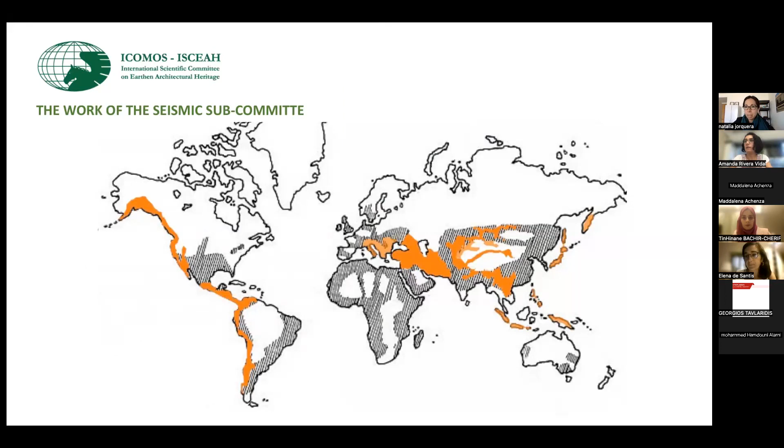In this first part of the meeting, I'm going to present the work of the SEISMIC subcommittee that, as Maddalena said, is one of the 5 subcommittees that are part of ISCEAH, which is part of ICOMOS. I'm going to start with a question. Why have a SEISMIC subcommittee inside ISCEAH? Because, as you maybe know, one of the main threats that affect earthen heritage is the seismic action. And there's a very big coincidence between places with a lot of earthen heritage and the strongest seismic actions in the world. So this poses a big challenge for the conservation of earthen heritage.

I'm going to come back to the first slide. However, there are many myths about the seismic behavior of earthen structures. Not all earthen structures suffer serious damages from earthquakes. So it's a challenge for the research, for the field of earthen heritage, for the conservation, to know which are the real reasons behind the collapse and the damages suffered by heritage.

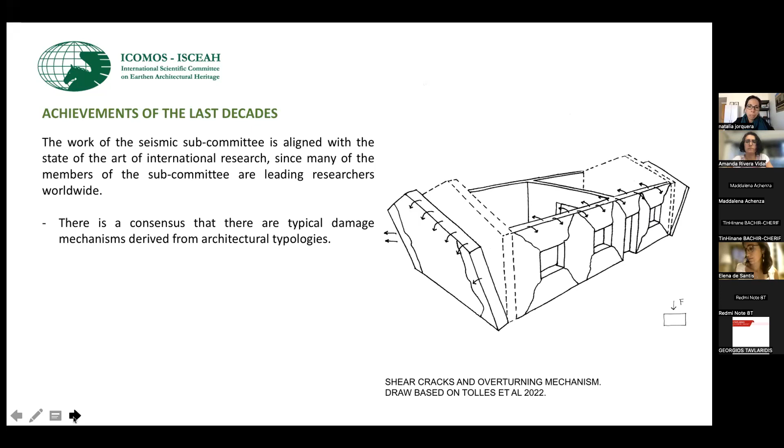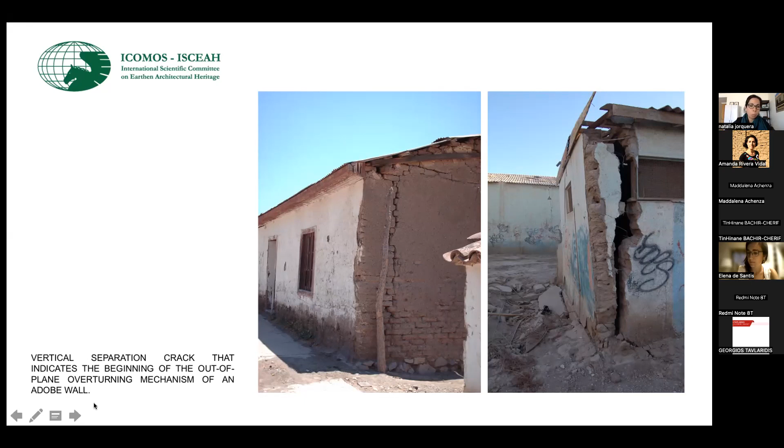This drawing was made for the first time by the Getty Conservation Institute in the United States, but you can see this kind of typical mechanism in all similar architectural typologies disseminated around the world. For example, here you can see two houses in different parts of Chile of more or less the same typology, a one-floor house of adobe masonry. Here you can see this vertical crack that indicates the beginning of the overturning mechanism of the adobe wall. So the lesson behind this is, if we anticipate which are the mechanisms of damage, we can act for prevention and we can avoid the mechanisms of damage.

Another important achievement of the last decades is that there is a consensus that the most serious seismic damage does not depend exclusively on the earthen material, but rather on multiple factors, such as the soil, the geometry of the building, bad construction practices, the inappropriate alteration of the buildings, and also the inappropriate reinforcements of conservation practices made mostly during the 20th century.

Or sometimes because of other preceding pathologies, most of all the pathologies that depend on moisture, that most of the time make the resistance of the walls decrease considerably.

The example that you see on the right is a Chilean church in the north of Chile that was built in 1760, so it survived for about 300 years with many earthquakes, but it collapsed after the 2005 earthquake because of beam reinforcements made of concrete that were put on the upper side of the walls.

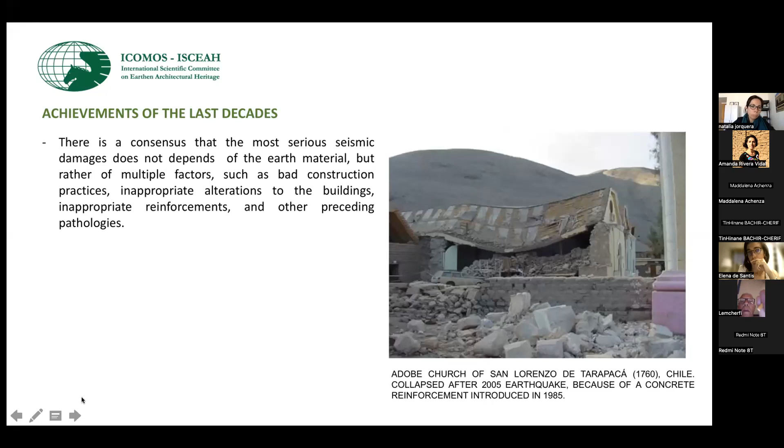And the third achievement of the last decade is the research of suitable reinforcement for earthen structures, mechanically compatible and that do not affect the authenticity of the heritage. So there is a lot of research on how to introduce compatible reinforcement.

This is an example of reinforcements made in houses of Belén in the north of Chile, reinforced with chicras, that are ropes, in adobe walls. That is a recent technology developed by the Pontificia Universidad Católica del Perú and then disseminated in other countries.

Which has been the work of this subcommittee in the last years? In the last period, which was under the coordination of Claudia Cancino, earthquake mitigation guidelines for earthen historic structures were developed, and this document is in its final phase of revision before being published by ISCEAH. This document will be mainly for public authorities, for them to know what to do before, during, and after an earthquake. So it's a document that is useful for emergency cases.

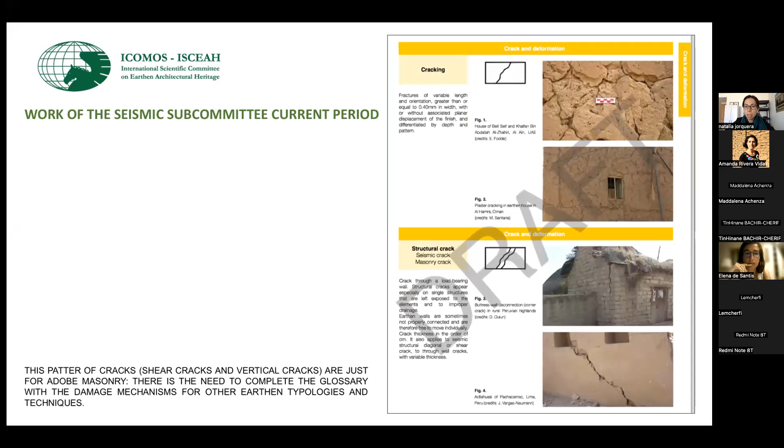So the idea now is to enlarge this research. These failure mechanisms associated with different techniques and different architectural typologies will be disseminated in a glossary of earthen material deterioration. That is this document that is under development. And this is part of this glossary, in draft. And as you see on the right side, this pattern of cracks that I also showed before are the most typical shear cracks and overturning mechanisms, in adobe walls mainly.

And to finish, which are the challenges for this subcommittee for the next period? I think one of the most important is to transmit the knowledge acquired inside the scientific community outside the scientific community, and to reach the inhabitants of earthen structures, the local governments, the decision stakeholders, and also the media. Because most of the time it's the media that first makes this bad publicity after every earthquake.

And the second challenge, I think, is to disseminate these preventive measures because, of course, a lot of earthen heritage is vulnerable to seismic risk, and we need to prepare it better to face the future earthquakes that, in places with big seismicity, will continue to happen.

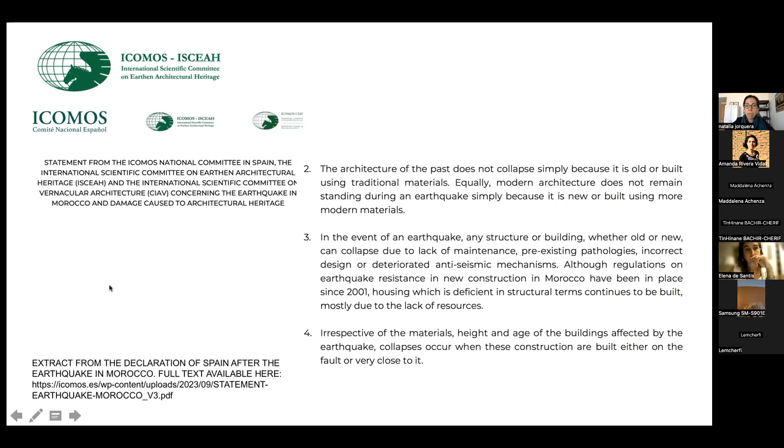So this is the most recent activity that we have made inside the ISCEAH and inside the seismic subcommittee. And at the moment, we are trying to collect more information from Morocco because, as very little time has passed since the earthquake, we need to see and assess which are really these failures of the structures for understanding what has happened.

And thank you very much. This was the presentation of the first part. Thank you, Natalia. Thank you very much. Okay, should I present myself or you?

So Elena is with us today, and she is the emerging professional who is accompanying Natalia today. Elena is a qualified architect with a master's degree specialized in conservation and restoration of architectural heritage and landscape. She has been extensively researching the valorization and dissemination of vernacular urban architecture, and currently she is a PhD candidate at La Sapienza University in Italy in partnership with the University of La Serena in Chile.

She works in international cooperation as a conservation architect, and she has been involved in design and restoration projects in Italy, Iran, Portugal, Kosovo, KSA, Chile. She's a member of Terra ODV and ISCEAH, and of course, she's a member of ISCEAH Emerging Professionals. So the floor is yours, Elena.

Thank you. Okay. So today I'm going to present a case study that I had the opportunity to study and research in particular during my specialization thesis. This is a peculiar case in the Abruzzi region in central Italy, which, as you know, with the Marche region and Umbria, is one of the most seismic regions in Italy.

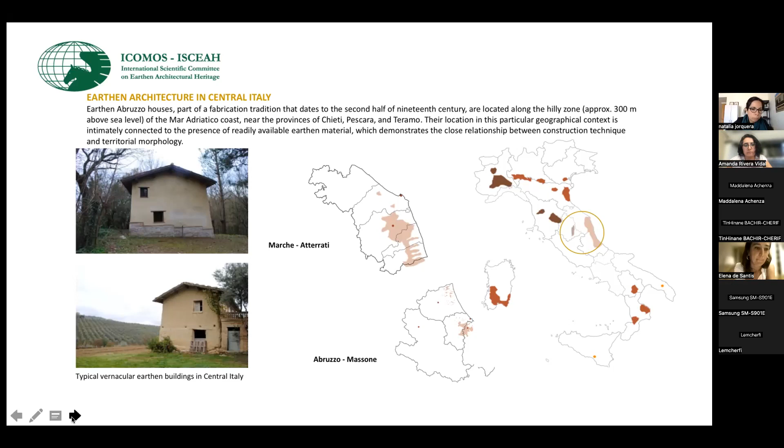You can go on. Yeah. As you can see, the technique is worked like loaves. In the picture, you see the movement of the hands, which is very similar to the mixing procedure of the massoni, which is made with this earth. The soil has a very good composition in minerals, and it is good also, of course, for the construction, to build in such a context. Okay, go on.

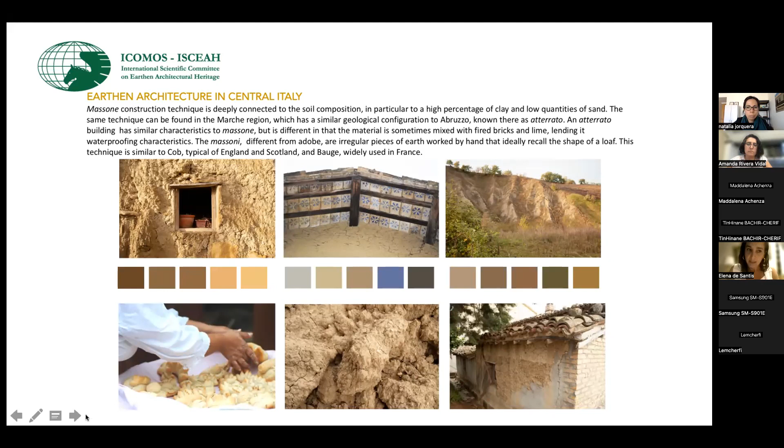It is curious that this heritage is located in central Italy, which is actually, as you can see in the map, a very seismic territory. Even last week we had an earthquake in central Italy, but this heritage is, thanks to the morphology and the construction, quite resistant to earthquakes, due to the fact that the building is built in such a way that at the base the masonry is thicker, and the more you go up, the thinner it becomes, and in such a way the building can resist earthquakes.

And it is very interesting that this rural heritage, spread in the countryside of the Abruzzi and Marche region, is done by simple people who actually knew the role of earth and knew how to build anti-seismic houses for themselves. And this know-how is under threat nowadays, because the memory is being lost due to the fact that this heritage is often abandoned. There is lack of maintenance, and also the owners of these houses decided to destroy the buildings and build concrete houses instead of renovating the heritage.

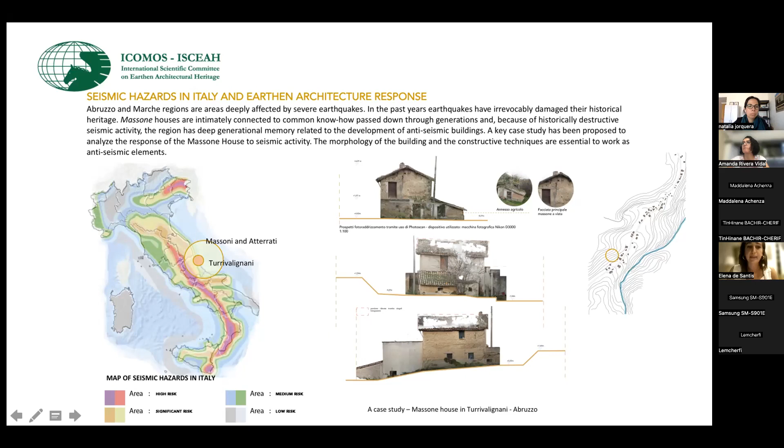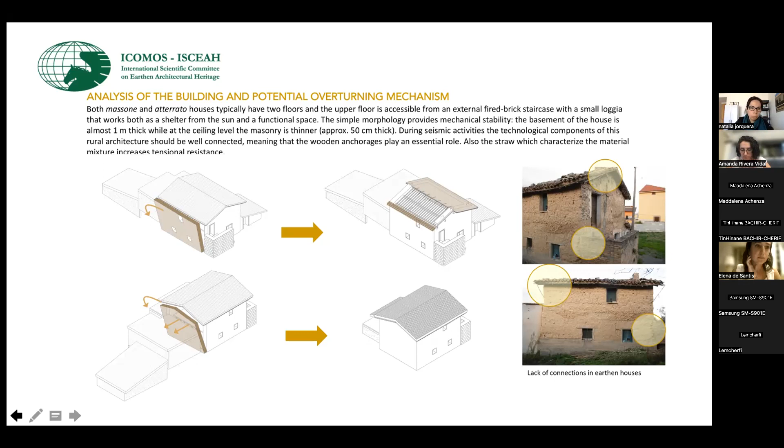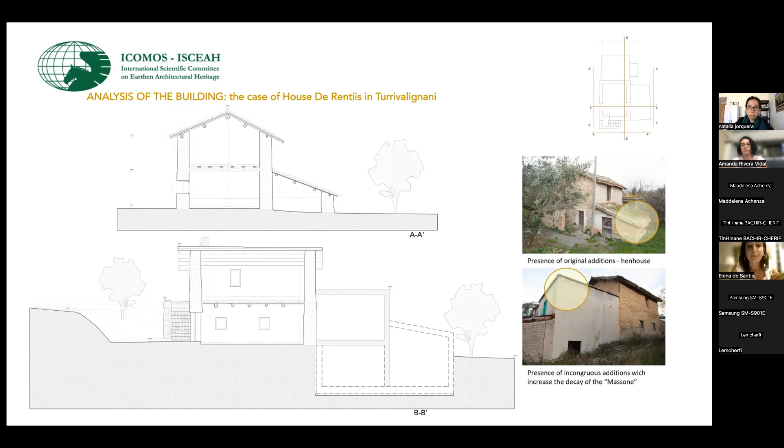Another element that we have to make sure is there on site is the wooden ties, of course, in order to prevent the overturning of the facade during seismic actions, and make sure that the humidity does not enter the building. So make sure that all the drainage and the crawl space is in place. Normally, these buildings don't have a real foundation because the house is directly connected to the soil, so we don't have anything that separates the building from the soil, the earth.

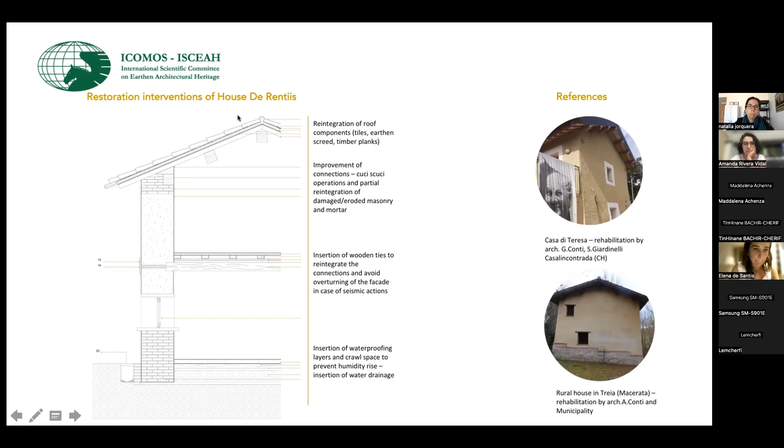This heritage has been constructed since the 18th, 19th century, so it is related to these dates of the earthquakes. But still, all the damages that we could observe have been observed on other types of heritage, located in other places like L'Aquila, due to, of course, failure mechanisms and also problems related to the material, to the lack of mortar and the use of techniques that were not suitable for that type of heritage.

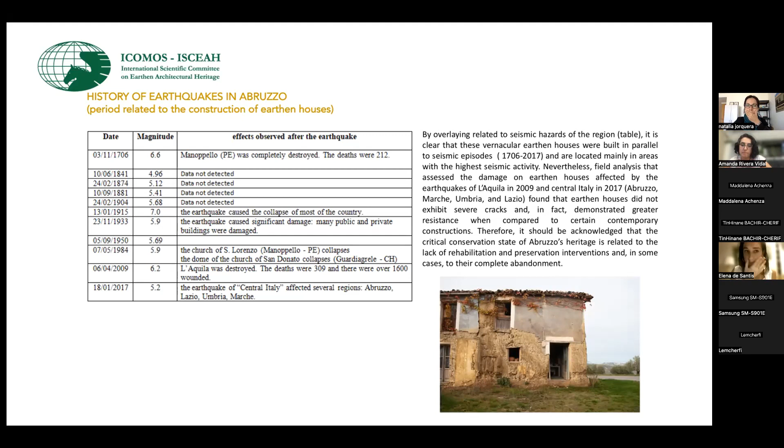And I'd like to conclude by sort of reclaiming regeneration of this heritage, because the first thing that we can do in order to preserve and to valorize earthen heritage is to know this and to know and disseminate information about this heritage. So there are a lot of examples of earthen houses, vernacular houses that are under destruction because of atmospheric agents, because of rain, because of lack of maintenance, because of, of course, other types of choices by people who prefer destroying their own house to build other types of concrete houses.

There are, of course, several NGOs, private sector, and also public sector who are doing a lot to actually implement dissemination and valorization projects through master plans, through good initiatives, like the association I'm part of, Terre Onlus, which has its base in Casalincontrada in the province of Chieti, very, very close to the building that I showed you before. So I conclude by inviting you to come and see this heritage, because the first step to valorize it is to know it.

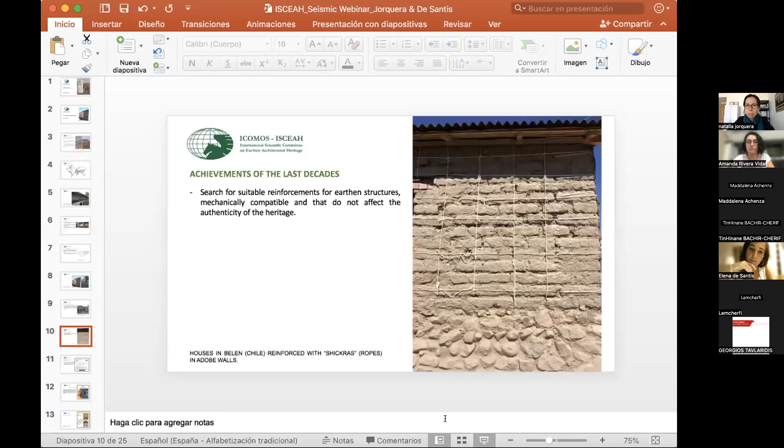Yes, it's a vernacular seismic resistant technology that has been reproposed. Yes, and I would like to show it again. As Amanda said, this was a vernacular seismic resistant solution that was found in Peru in some archaeological sites, and it has been reproposed by the Catholic University of Peru. And this is an example from northern Chile, where an entire rural village was reinforced with this kind of

ropes. And as you've seen in this picture, the ropes are put in order to avoid the collapse of the adobe walls. They are put on one side of the wall and the inner side of the wall, and they are connected transversally also by ropes like this. And they are also tied to the beams of the roof and also to the foundations. Also to complement, because they ask about what type of material. These are ropes. They're plastic ropes, right? Also cotton ropes, not just plastic. And I think in this case, these are cotton ropes.

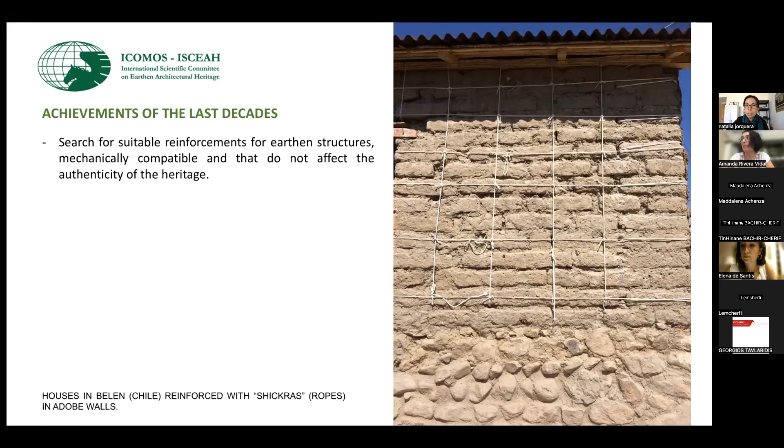And they ask also about the thickness of the mortar layer, about the plaster. The thickness, I think it's about 3 centimeters more or less, the base plaster. Then there's another one that is thinner, that is the finish. The important thing is that it has to cover at least 1 to 2 centimeters over the rope. If not, there could be lines in the plaster. Of course. Thank you very much. Thank you also, Susana, for the question.